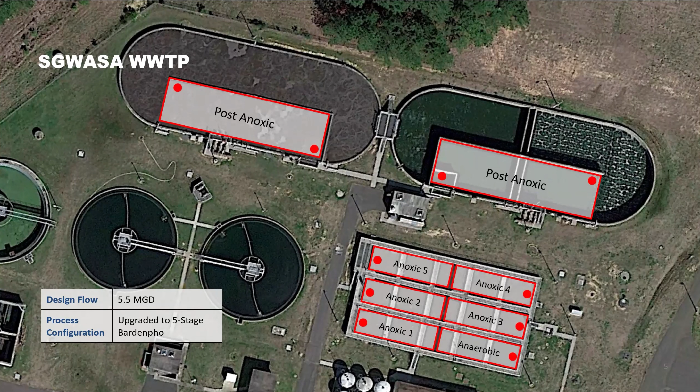6 years later, in 2021, the plant took a step toward reducing their chemical addition with an upgrade to Biomix DC in their anaerobic selector. By changing their mixing regime, they increased their anaerobic mass fraction, created a fermentation sludge blanket, and increased VFA production. The result is more consistent biological phosphorus removal, which has allowed them to reduce their chemical dosing. We have a short testimonial from their superintendent who says, "We like the Enviromix system, and obviously we've gotten positive results."

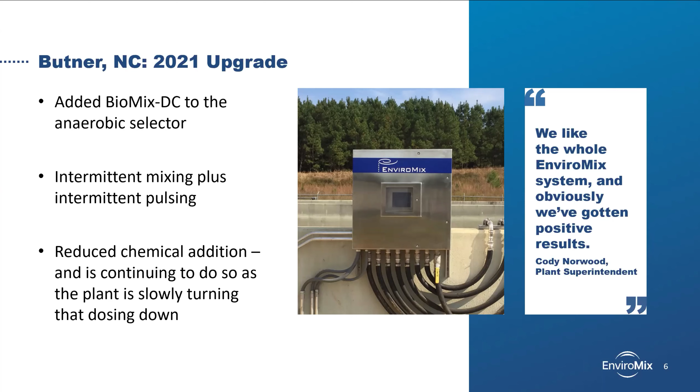The general concept is that Biomix DC creates a fermentation blanket during an unmixed period, and then resuspends the solids during a mixing period. But because of how compressed gas mixing works, Biomix DC provides gentle intermittent pulses throughout the deep cycle to transport VFAs out of the blanket without disrupting the fermentation and hydrolysis.

Since this installation, we have well-documented results from multiple facilities realizing increased VFA production, increased phosphorus release in the anaerobic zones, and improved effluent phosphorus quality.

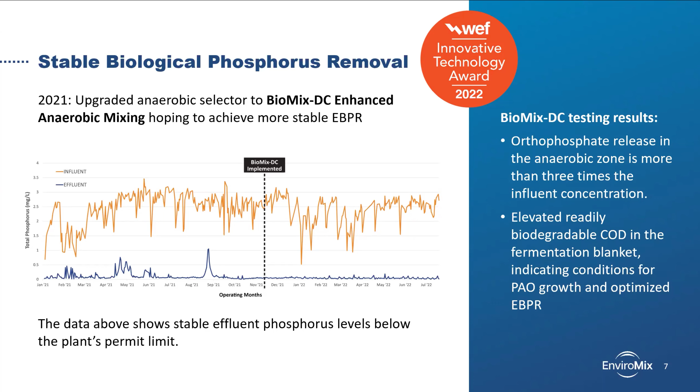Since versatility was included in the title of this presentation, let's look at how SGWASA did just that. They were able to mix 8 zones with a centralized compressor system, saving energy and eliminating 9 additional pieces of equipment to maintain. They utilized their existing Biomix equipment, and with a program upgrade alone, they improved their biological phosphorus removal. They also integrated Biomix with diffused aeration, giving them flexible control over their post-anoxic zone.

And if they need to reduce their total nitrogen or reduce their recycle pumping rate, this volume can be used as a second anoxic zone. This gives them a lot of operational flexibility and would be challenging to do with other mixing technologies. Most other mixing equipment cannot be operated simultaneously with diffused aeration, which can destroy the mechanical mixing equipment through cavitation. But with this sort of arrangement, they have quite a lot of versatility and can operate both aeration and mixing simultaneously.

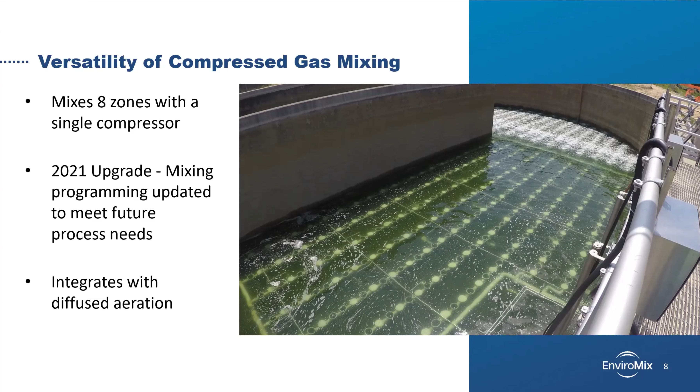Hopefully that case study gave you some sense of the benefits of Biomix. But let's take a step back now and go through some of the fundamentals, specifically how compressed gas mixing works. Biomix works by releasing air through engineered nozzles that are fixed to the floor of the tank. Sequential bursts of compressed air provide mixing to the entire basin from the bottom up, with the large bubbles expanding as they rise to completely mix the tank contents.

This animation is accelerated slightly to illustrate the mixing regime. Most mixing systems are typically fired from each location every 20 or 30 seconds, about 2 to 3 times per minute. And there is built-in flexibility in the mixing parameters. And I'll give two examples. The operator can change the mixing frequency. Instead of firing every 20 seconds, the operator could choose 15 seconds to get more agitation.

They can also change the duration. Instead of a half a second burst, a large bubble could be released with a 1 second burst. These and other parameters all provide the ability to increase or decrease the mixing intensity to suit process requirements.

At first glance, it's not uncommon to see Biomix and draw comparisons with coarse bubble aeration. But because Biomix produces a much larger bubble, surface contact is minimized, and because the bubbles are fired intermittently, Biomix uses 95% less air volume and therefore doesn't transfer oxygen. This is why it is widely used to mix anaerobic and anoxic environments, as we highlighted previously in our first case study.

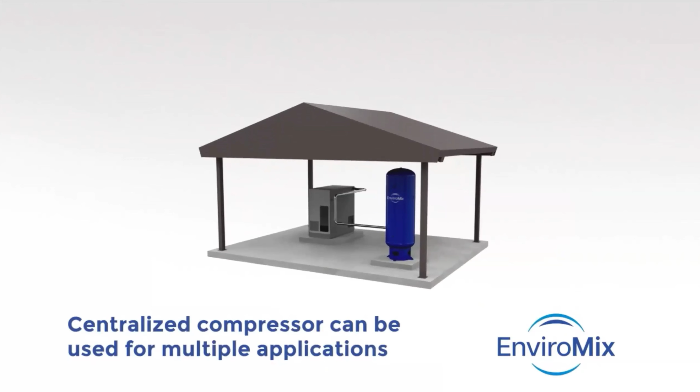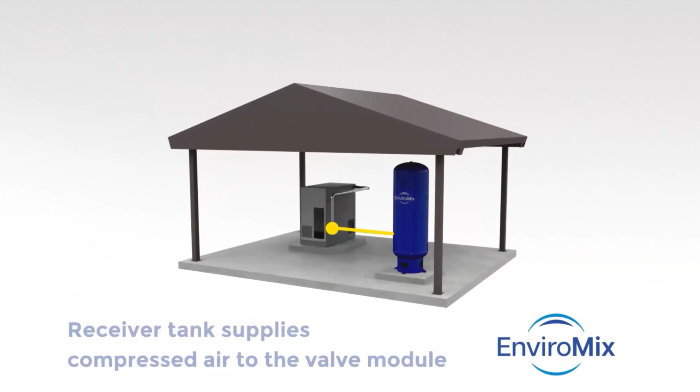Biomix starts with a centralized compressor that can be used for multiple applications. The compressor, which uses ambient air, modulates to maintain system pressure while conserving energy when demand is low. Charged by the compressor, the receiver tank supplies compressed air to the valve module.

This controls the mixing intensity and releases the bottled up air in high pressure, high velocity, timed bursts through engineered nozzles across the floor of the tank. Large volumes of gas generate an upwelling motion and create large circulatory currents, suspending solids and maintaining a completely mixed environment. On the surface, you can see the convergence of these currents and the uniform distribution of energy showing the entire volume is mixed.

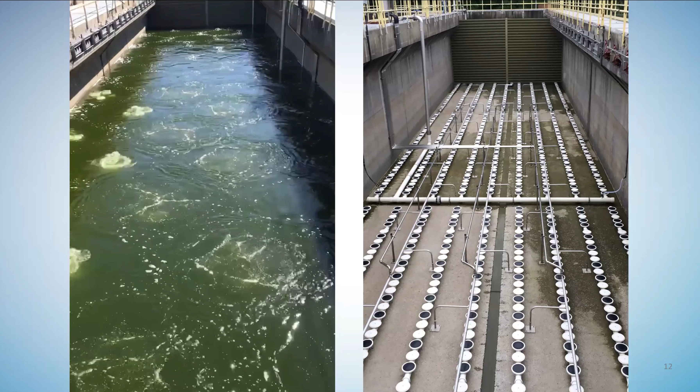That was an animation of the process. I also wanted to share an actual video of the system working in a clean water test at a plant in New York. In this application, the biomix nozzles on the floor of the tank integrate easily with the aeration. And just like the post-anoxic zones at the SIG-WASA plant, this allows the plant to mix, aerate, or do both simultaneously. In many cases, aeration equipment is sized to provide enough air for both oxygen demand and

for mixing energy. For fine bubble aeration, the requirement for mixing energy is 0.12 SCFM per square foot of tank area. This threshold can be limiting when trying to turn down the aeration, which is where supplemental mixing comes in. In fact, decoupling aeration and mixing provides a big feature of biomix, offering flexibility in a number of applications, but more on that later. The mixing requirement for sludge holding tanks and aerobic digesters is often much higher, meaning the energy savings potential with compressed gas mixing is that much greater.

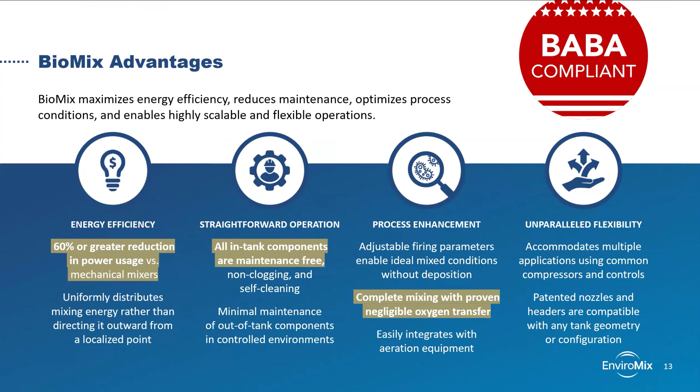In summary, I hope you have learned how biomix accomplishes the gold standard for mixing by accomplishing versatile and reliable mixing, requiring low maintenance, all the while saving significant energy. Of note, Enviromix scope is BABA compliant.

Sarah? Thanks, Mark. This brings us to our first audience question. How does biomix ensure negligible oxygen transfer while mixing efficiently? Is it short duration bursts? Is it large bubble size? Is it high pressure, low volume air? Or is it all of the above? I'm going to give everyone just a couple of moments to take a vote and pick one of the choices, and then we'll review the answers together in just one moment.

All right. Well, I guess I can't fool any of you. It looks like many of you selected all of the above, which is the correct answer. Congrats to those of you that got it right.

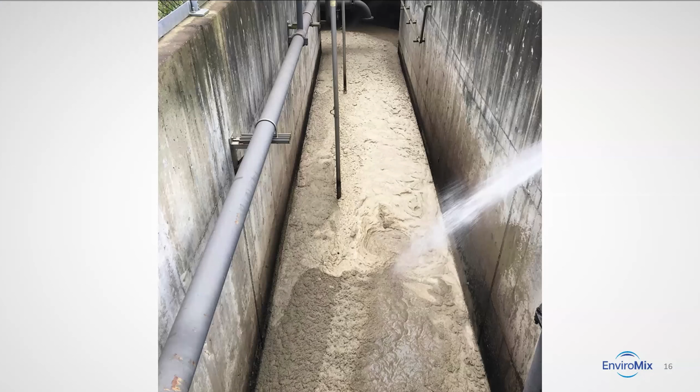Thank you, Sarah. Now we're going to shift gears to talk about our second case study, Wellington, Utah, which is a town of about 1,700 people located on the Price River. Diffused aeration is a very common technology in many channels across wastewater treatment plants. It's a great solution for keeping solids suspended because it provides bottom-up mixing and is suitable for long and narrow tanks. Overall, it is a great solution for 20th century plants where the aeration can assist in delivering oxygen and

help break down carbon. However, with biological nutrient removal plants, consuming carbon or adding dissolved oxygen in channels detracts from the biological nutrient removal process. Whether it's preserving readily biodegradable carbon for biological phosphorus removal or for denitrification, that carbon is better utilized without oxygen, and that is a major driver for selecting compressed gas mixing for channels.

In 2022, the Price River Wastewater Treatment Plant replaced their existing diffused aeration with biomix in the influent channel with the goal of maintaining an anaerobic environment, and they also added biomix to their two anaerobic basins. At 2.2 million gallons per day, this is a smaller plant with less tanks to mix than our previous case study, but they are still able to tap into the versatility biomix offers.

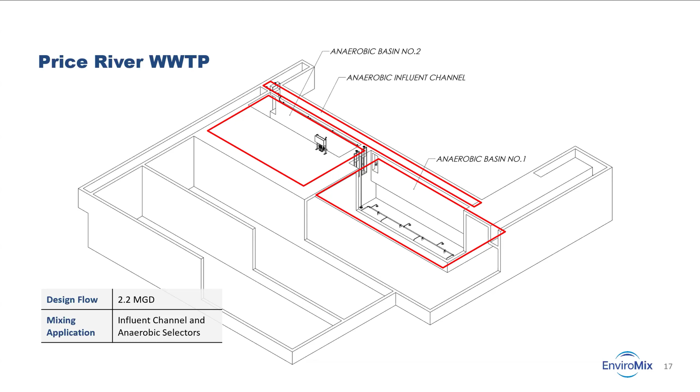They already maintain their compressor, and the rest of the Biomix system doesn't require any regular maintenance because the nozzles and in-tank equipment are maintenance-free, non-clogging, and self-cleaning. Here is something the plant superintendent Blaine said about the system.

I like the fact there are no mechanical or electrical parts underwater. That's part of the reason I wanted to go this route versus some other kind of mechanical mixing. And I like the fact that it's pretty much all stainless steel, so there's not much opportunity for corrosion. Without underwater moving parts and clog-free stainless steel wetted components, that leaves the only maintenance required, which can be done conveniently within a climate-controlled building.

The simplicity of the system is something we hear often. No operator wants to be taking mixers out of a tank when it's 100 degrees in the peak of summer or 0 degrees in the bleak, dark winter months.

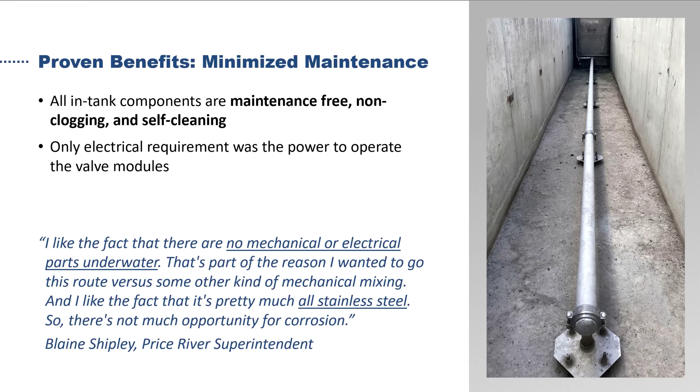I mentioned that this plant was targeting anaerobic environments in both the influent channel and the anaerobic selector. So let's dig into that a bit further. To test this, we shipped our mobile ORP testing unit out to Utah to get some live data. Generally speaking, anything that is above plus 50 millivolts can be considered aerobic, and below that to about minus 200 could be considered anoxic, and below minus 200 millivolts is anaerobic.

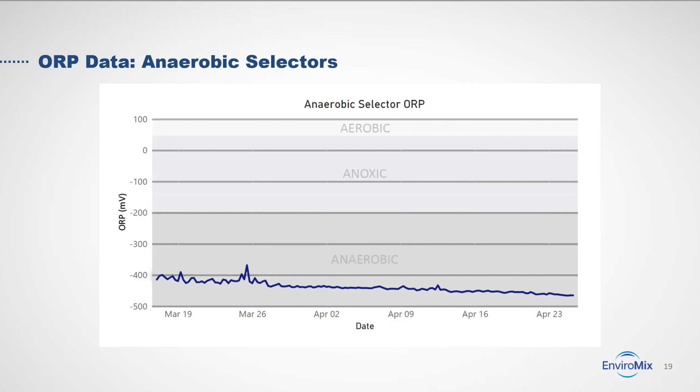Then we asked plant staff to move the ORP probe to the influent channel. And remember, they replaced their aeration equipment with the compressed gas mixing, and it's operating 24 hours a day, providing a burst of compressed air every 20 to 30 seconds without oxygen transfer. And in this case, again, we see that the ORP is consistently low and anaerobic for several weeks.

In conversation with other operators using other technologies such as diffused air, we have heard that sometimes they need to turn down the air supply to their channels or stop mixing altogether in order to reduce the DO and ORP, something that is not a concern with Biomix.

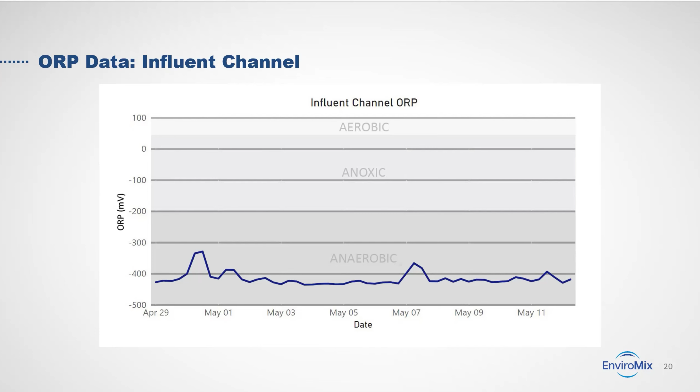Surprise, another question. Sarah, please take it away.

Thanks, Mark. This next question is around applications. So in which of the following applications can Biomix be effectively utilized? And you can select all that apply. Is it tanks up to 30 feet in depth? Is it applications with solids concentrations up to 8%? Is it tanks with obstructions? And or is it tanks of unusual shapes or with sloped floors? I'll give you all a few moments to think about that answer and reply, and then we will share the results in just a moment.

All right, here we go. I see a mixed bag here, and it seems like you all kind of caught on from our last question, and the majority of you selected many, if not all of the answers, which is correct. We offer a lot of versatility and flexibility when reliable mixing is required, and Mark's going to talk a little bit more about some additional applications.

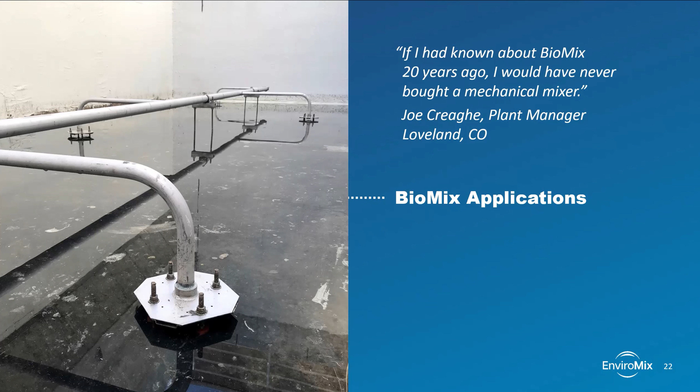Thanks, Sarah. So far, we have talked about BNR mixing and channels, but I'd be remiss to give a presentation on the versatility of compressed gas mixing without discussing the other applications where Biomix is applied. It is really great to see our customers appreciate the value of Biomix, including this customer in Colorado. Here I will focus on 3 applications that demonstrate other ways to unlock versatility.

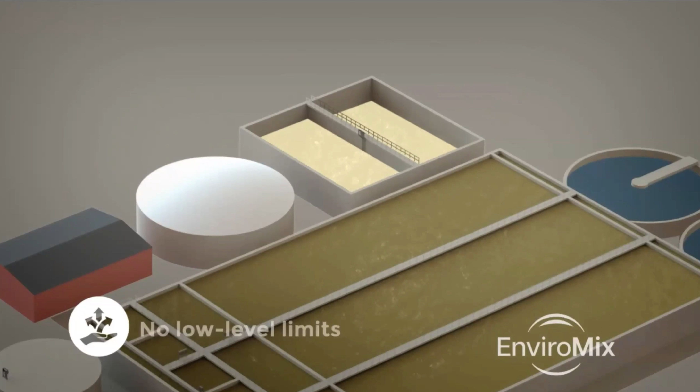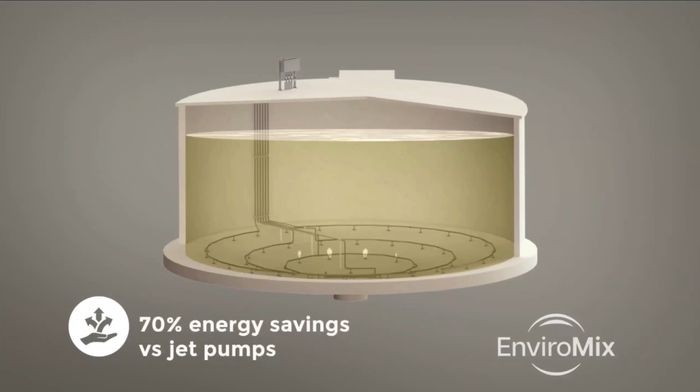In EQ tanks, Biomix is far less energy intensive than aeration and can be operated when the liquid level in the tank is variable. In sludge tanks, Biomix headers can conform to the cone bottom shape of the tank, mixing the entire volume without dead zones. This allows plants to unlock the full volume of their cone bottom instead of filling them with concrete or losing that volume to accumulated solids.

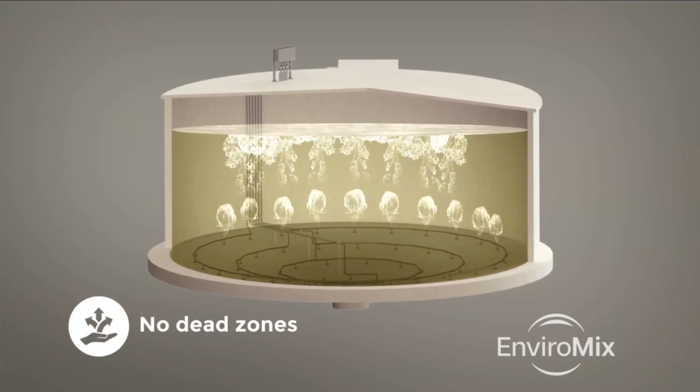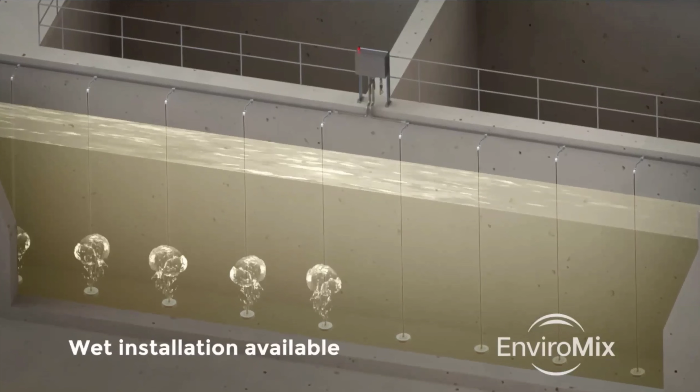In channels, Biomix is far less energy intensive and can be installed with different configurations. In 2018, a plant in Garland, Texas was unable to take their mixed liquor channel out of service for installation. The engineers at Enviromix designed a system for wet installation of the nozzle system while the channel remained in continuous operation. Enviromix offers unparalleled flexibility to suit unique customer needs.

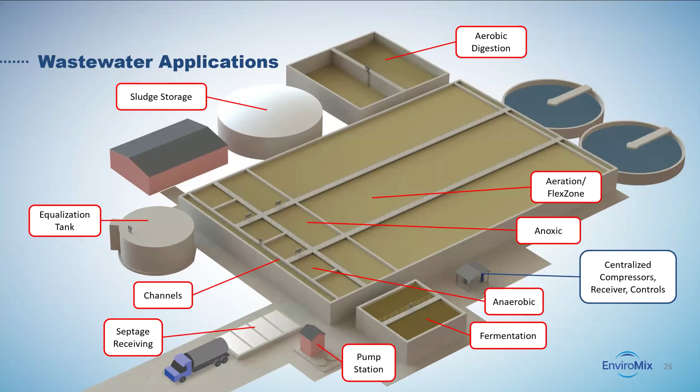A typical wastewater treatment plant has multiple applications requiring mixing, and we have highlighted a snapshot here, all of which are applications Enviromix has successfully mixed. As I've alluded to earlier, end users can get the most bang for their buck when mixing multiple applications with a single compressor system.

Whether it is channels and BNR tanks or EQ tanks and sludge holding tanks, there is a great deal of benefit to be gained when sharing a compressor, receiver tanks, and control system.

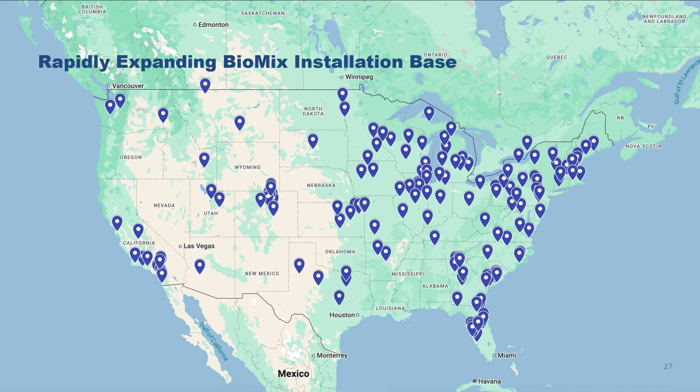To cover a few more applications and to finish off our webinar today, we will now introduce the Exeter Wastewater Treatment Facility in New Hampshire.

The Exeter, New Hampshire wastewater treatment plant went through an upgrade in 2017, in which they looked to provide mixing and aeration systems for their first stage anoxic, anoxic swing, aeration, second stage anoxic, and sludge holding tanks.

This facility at 4.5 MGD was designed with 2 trains for redundancy, and due to the number of small tanks requiring mixing, compressed gas mixing was selected in order to minimize the number of mixers and to save on the overall cost of ownership. They upgraded to a 4-stage Bardenpho process in order to achieve their new nitrogen removal requirements.

They were able to implement a very flexible process that swings between aerobic or anoxic environments, both on the front end and back end of the plug flow system.

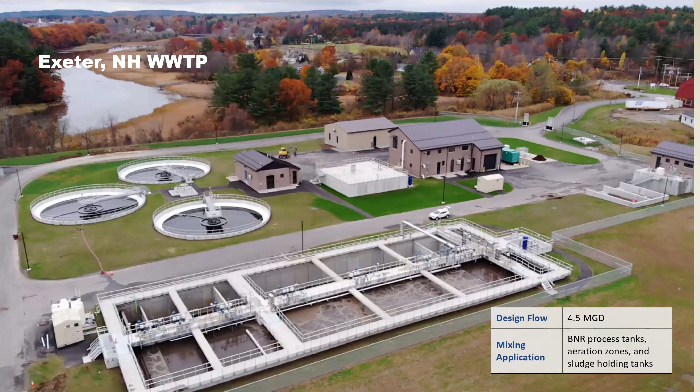So how did this plant unlock the versatility of compressed gas mixing? Well, certainly they benefited from an economy of scale. They can have separate zones, not requiring individual mechanical mixers, and again, they have a single compressor for convenient maintenance.

Most plants with this type of arrangement prefer to add air only as needed to keep the sludge from going septic, but most of the time they can just keep it mixed, and they can also mix while desludging to achieve a consistent solids concentration to the sludge processing system.

Decoupling aeration and mixing not only helps save energy, but also provides a tool for greater optimization across a number of applications.

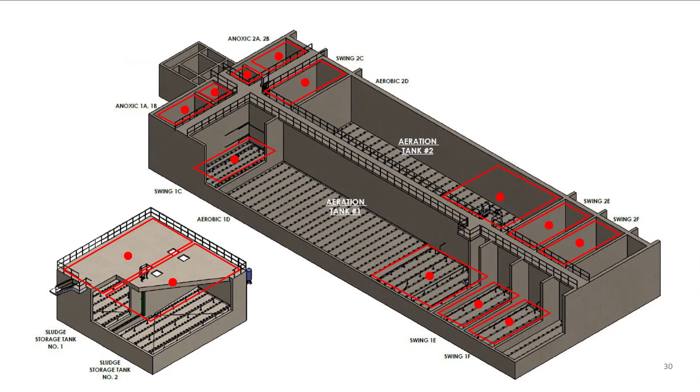They also have versatility in how they operate their aeration zones. They have one swing zone at the front that allows them to expand their first anoxic zone, and 2 swing zones at the back that allow them to operate aerobic or anoxic environments.

Further, they have a mixing system at the end of their aeration zone that allows them to provide mixing when that zone is mixing limited. What I mean by that is they have a DO aeration controller that turns down the airflow.

But when there's not enough air to provide mixing, BioMix is available to provide complete mixing to that zone and a tighter DO control strategy. Having the ability to decouple aeration and mixing is especially beneficial to plants that are underloaded.

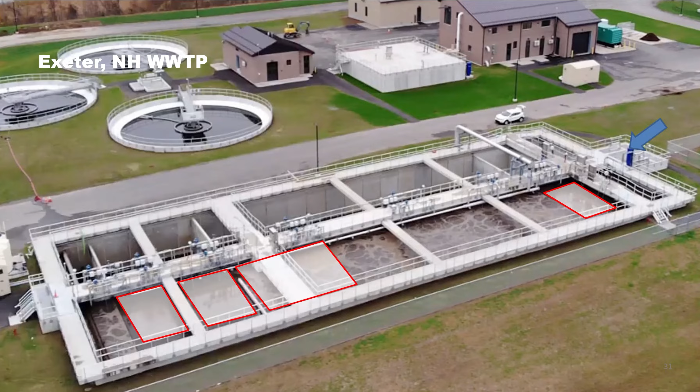Exeter was upgraded in 2017, and the use of compressed gas mixing to combat mixing limited conditions was also implemented at other plants. The issue of plants being underloaded kept presenting itself, and in 2022, EnviroMix launched FlexZone Adaptive Process Volume to help provide plants the operational flexibility to match operations to current flow conditions, especially when designed for higher flow and loading of 20 or 30 years in the future.

FlexZone consists of BioMix and diffused aeration in one or more subzones, working together to achieve treatment objectives. It works by automatically enabling or disabling aeration in these subzones based on actual influent loading to the plant. By aligning aeration grids and BioMix, the system can scale up or down based on operator inputs and automatic instrumentation feedback, without baffle walls between each subzone.

Each subzone can mix, aerate, or do both simultaneously, which is what we call SynchroMix. By decoupling aeration and mixing, the process can instead be dynamically controlled using instrumentation feedback. FlexZone is suitable for both new plants and existing facilities. By flexing these volumes, FlexZone produces energy efficiency benefits, but also produces improved treatment with tighter control over key process indicators.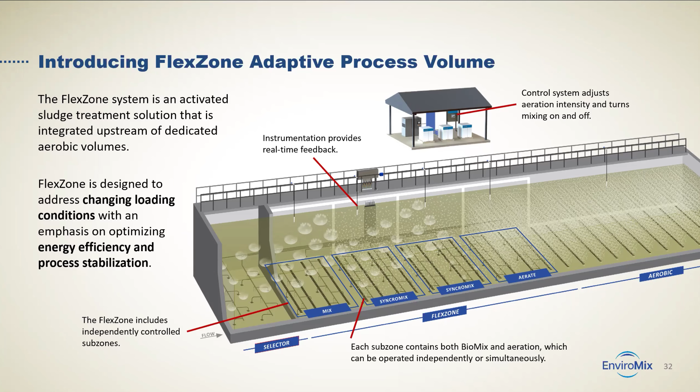So with that, I wanted to wrap up and remind everyone that this presentation today was primarily focused on BioMix compressed gas mixing as the gold standard for mixing. However, FlexZone being one of our process technologies, we also offer a large family of products all centered around mixing as the core of our technology. In the past several years, we've expanded our portfolio to include process solutions for conventional activated sludge, nutrient removal, inline fermentation, RAS fermentation, aerobic digester processes, and more. At EnviroMix, we are looking to provide holistic solutions for optimized treatment, in addition to being a great mixing technology.

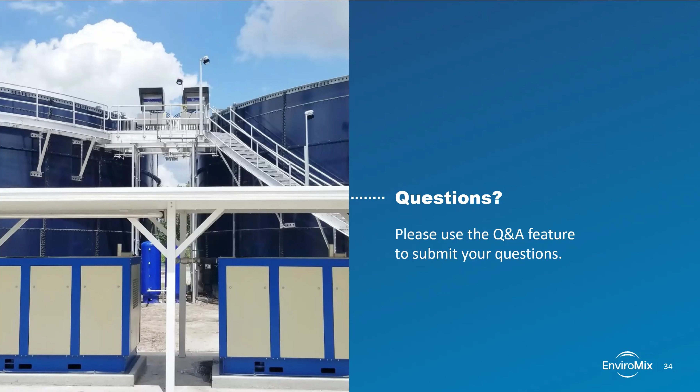This is a good one. Please clarify if the same air system can handle tanks with different water levels. Yeah, here I would presume we're talking about the compressed gas mixing system, BioMix. Yep. And the answer is yes, absolutely it can. The reason it can do this is we are releasing air to a common header with a number of nozzles on it one at a time. And that header could be at a different water level than others in the same system.

So even though you have different water levels and thereby different pressures on a common system, since the air is only being released from one header or one valve at a time, you can operate this system at different water levels. It's a good question, especially as we run into conical bottom tanks where we array the headers at various depths. We can fire that system of nozzles at a point in time different from others at different levels. So that works out really great.

Yeah, I've seen that myself in systems where they've got an aeration grid and a big deep cone, and you're able to mix all the way down to the bottom of that cone, even though the aeration grid is up above it, like in an aerated sludge application.

Another question for you, Mark. This one was asked, I think, when we were going through one of my questions. It says, why do you cut off the applicability at 30 feet of depth? I think they might have just caught me on my terminology, the way the question was worded.

Yeah, it's a good question. Our experience, we've mixed tanks up to 30 feet in depth. Pretty uncommon to run into tanks requiring mixing at greater depths. That's just where our experience is at this point. Likely we could, because we're using high pressure air, look at doing tanks greater in depth than that, but that's pretty standard in this industry.